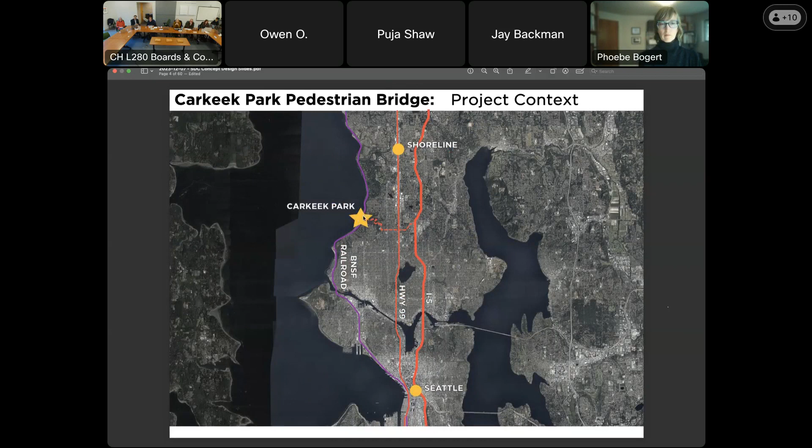When we started the feasibility study back in 2020, it was a two-part study. We were looking at the conditions of the existing bridge on the site, and also at what alternative replacements might end up looking like.

One of the things we found in the initial assessment of the bridge was looking at what life it had ahead of itself at that point. It's difficult to put an exact number on something like that, but what we came away understanding from a number of observations was that it is reaching the end of its useful life.

And there's not actually an ability to rehabilitate that structure, given that its foundations, its supports, even its height, all conflict with the requirements put forward by BNSF. So any work we would try to do would require lifting it up and moving its foundations out. At that point, we're building a new bridge. So that was what was decided.

I think something interesting to note is there's actually a spot on the bridge that was struck by a train at one point. We actually met someone at one of our community engagement meetings who saw it happen.

Things that have led to its demise over time, such as the concrete deck being right on top of the wide flange, leaving no ability to actually maintain that.

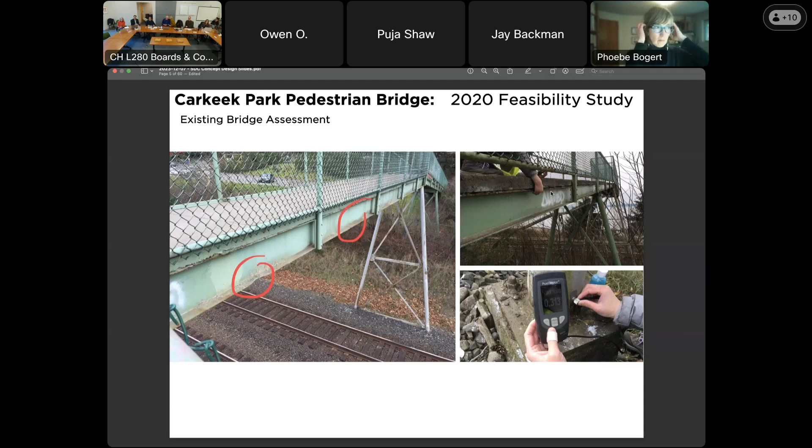And then there were some additional assessments of what was happening on various structural members, and you could see things like this, given that we're in a marine environment, corrosion is happening constantly to these materials. So that's something we want to be sensitive to with whatever we're pushing forward as the overall design.

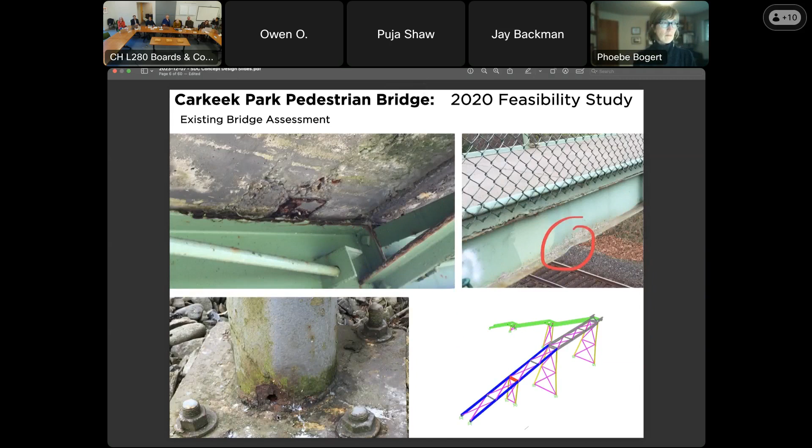So when we were then looking at the replacement bridge, we did an initial study to understand different span types we could use within this location. We're needing to pay attention to the BNSF requirements, particularly the vertical offset from the tracks, as well as the horizontal offsets from the center line.

But we also need to think about what our foundations are doing. We have two very different conditions. On the parking lot side, we have soils that we can easily bear on with ample room around them, and in particular, easy access to that. On the beach side, everything gets harder.

We have liquefiable soils. We're basically landing in sand that is in proximity to the water table. We don't have any ability to actually drive machinery out onto those tracks, so getting access to that is going to be a challenge, likely avoiding anything like barging things in, because then all of a sudden we're into needing shoreline permits.

What we ended the study with was looking at two different span types at that time. We weren't trying to fully design these, but the two different span types have different benefits to them, as well as compromises. The truss allows us to make a very economical system with easy integration of the throw barrier that we need.

So that was one of the options we were looking at. The challenge it imposes is that the parking lot foundation and the beach foundation are equally loaded, which makes a challenge for what we do on that beach side. The other alternative we looked at was a cable stay.

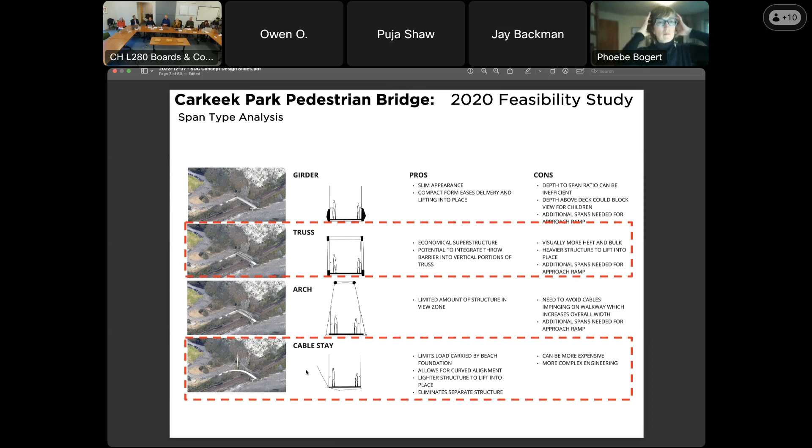The other reality is the current span is maybe a little bit more than 40 feet, but those foundations are in a location in the BNSF right-of-way that we could not replicate. So the span we're looking at is more on the order of about 100 feet long, just by necessity of that right-of-way condition.

Once we get to that length, a 5 foot wide path is not going to be stiff enough to deal with the lateral forces. So it offers us an opportunity for making a much more generous walking area on the bridge. We're looking at something in the order of 10 to 12 feet wide.

This will be influenced by what we choose as a deck material, which will then have an impact on the overall weight of the bridge, and that will then drive what the span has to achieve. So we'll be negotiating somewhere in there.

I think sometimes it can be seen as bigger could potentially be better, but in this case it's going to penalize us from a weight point of view. And at a certain point, there's not that much more we get as a benefit from that additional width.

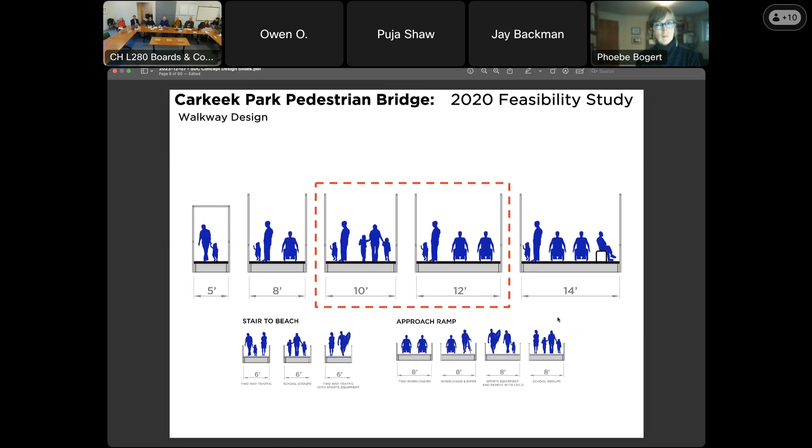We can either do a 10-foot tall straight throw barrier, or an 8-foot tall one to the maximum height, but it has to curve inwards a certain distance. The reality is when you unfold this one, it's 10 feet long. So our recommendation at that time, something we've done on past bridges going over BNSF, is to go with the 10-foot tall option. It just makes for a more enjoyable environment when you don't have something pinning you in. That's what we're moving forward with.

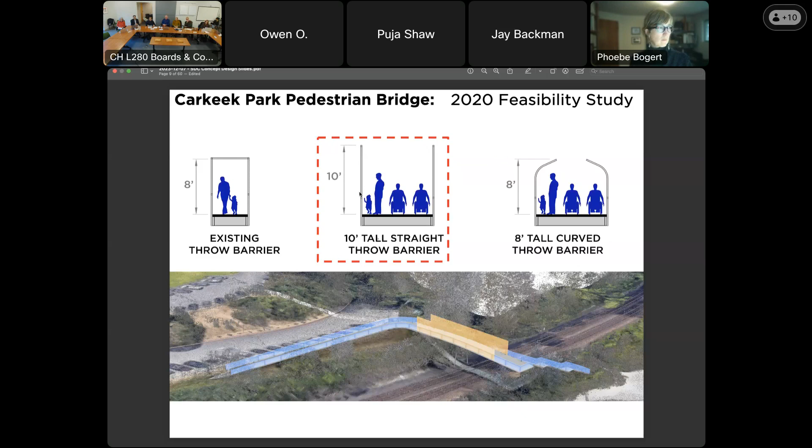It doesn't have to be perfectly straight, but it does have to be 10 feet tall. So if we were to splay it out, it's a little longer, but that can also lead to a more comfortable user experience on the bridge itself.

That then led us to the actual project competition that was put out. We were selected as part of that, and since then we've started working. I'd say we've completed this set of four initial bubbles. What we've been doing with this entire schedule is looking at how we go through the review process with various agencies, making sure we're doing that in a sequence that doesn't set us up to be in front of the public and mention things that later we have to reverse track on.

So we had an initial public engagement meeting out at Carkeek Park. We spent a day out there—DB will speak to that, hopefully. We were getting people's impressions of the park, of the bridge itself, and the experience out there.

We've put all of the material you'll see today in front of the Parks Department to get their feedback on the various alignments that we were beginning to look at, and we have some conclusions that we'll share from that meeting today. Now we're here with the idea that the next step for us is to put together a package of drawings that we then send off to BNSF to get their blessing, because they're the ones that are going to take the longest to review all of this.

And with that, I'm going to turn it over to DB to talk about the community engagement piece. DB, if you're there, just say you're there, and whenever you're ready, tell me to change slides. You could just say next.

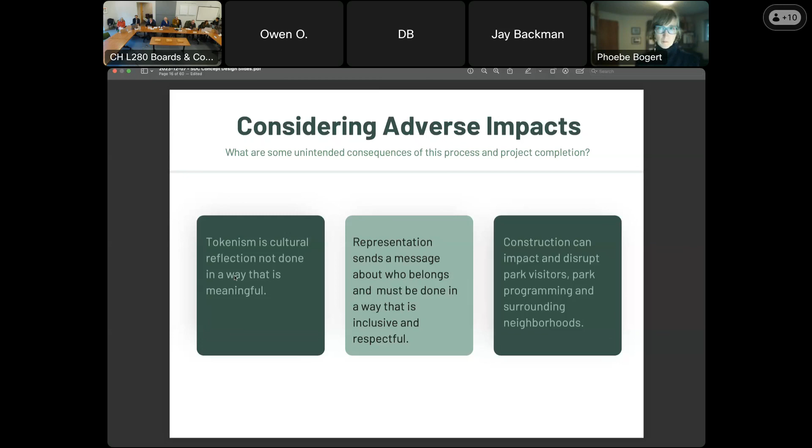How can we ensure we get representation and acknowledgement and engagement from people to make sure some of these things don't happen? Again, that was more from a racial equity standpoint and an analysis standpoint.

I'll talk a little bit more about how that really led us to create the survey, and then also the community engagement event.

We created these story leaves, and asked people to share their stories and experiences at the bridge, at the park, and what it means to them. We got a lot of feedback there, and we also did some cider pressing, which gave it an extra boost. Even though the weather was back and forth, we still had a great turnout overall, and really got key insight into what people want, how people want to feel, and memories they have from the park.

I can recall a story of some women there who talked about their experience. They had lived in the neighborhood for 80 years and talked about how they used to have to slide down the side to get to the beach before the bridge was even there, and what they wanted, how they wanted to feel with the replacement, and what it meant for them holistically. We got different stories from a diverse group of people and perspectives.

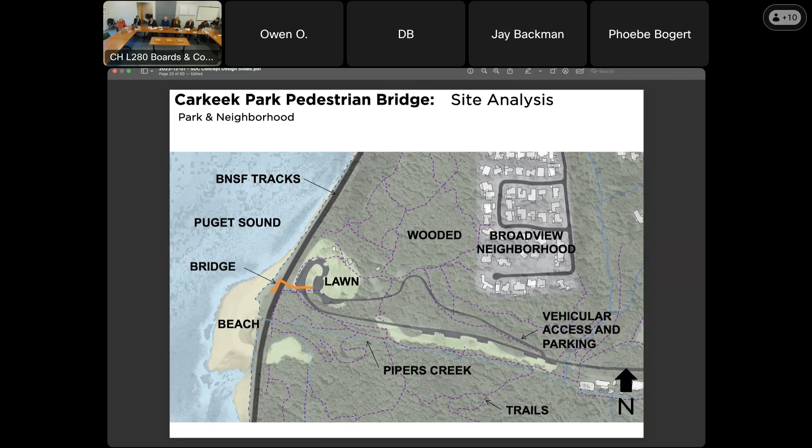If any of you have been there, it's quite a unique spot within Seattle - the progression down that winding road into the forest, eventually arriving at the lawn with the parking lots, and then the Salish Sea out beyond. Looking at the more immediate site, we have a variety of conditions.

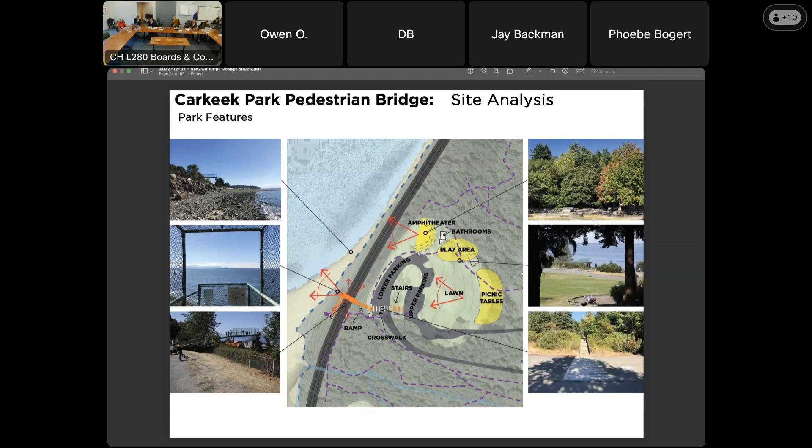We have picnic table areas, the play area, which is also currently under design for renovation - Colin is overseeing that piece of the project. We have the upper and lower parking areas as they wind around, and then the bridge finding its place on the west side of the lower parking, going over the BNSF tracks onto a small area of land on the west side of the tracks that is outside of the high water line, though that is going to continually be increasing, unfortunately. And then the beach out beyond that.

Here are some of the main circulation flows that we see around that. Within yellow, the car circulation is one way through this area. We also have the sidewalk that connects from the playground area all the way down to this lower meadow that is a historical orchard. Within the park, there's a trail system that goes through various areas of the forested zone. And the only connection at the beach is actually the bridge itself.

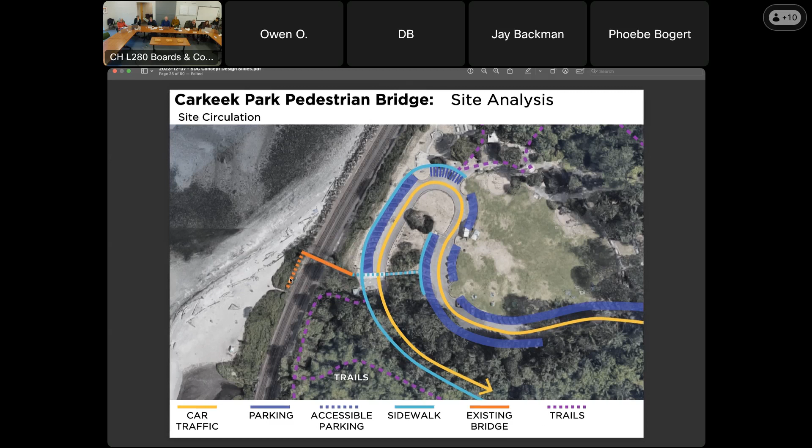So when thinking about whatever intervention we have on the site, we need to think about it from multiple different perspectives. What is the placement of this bridge in terms of this view from the park itself? It both is a wayfinding device as well as an object that shows up on this amazing vista. Here you can see the existing bridge over there.

We also want to think about what it's like to arrive at the existing bridge and how we can make it more accessible than it currently is. This ramp that exists right now is, I believe, a 14% slope, so not quite doing it. We want to think about what it's like to come over to this point and be able to then get eventually to this location.

This is one of the key aspects of this - it's partially being able to exist over the tracks so you can see those trains go by and get that rush of air as they come along and that sound Owen was talking about. But it's also a place people frequently hang out at the top of the stair and enjoy the view out to the Olympics. We really want to amplify that experience so it's not just a single individual occupying that corner at the top of the steps while getting in the way of everyone moving up and down the stairs, but instead a place where you can hang out and watch the activities on the beach as well as whatever's happening out in the Salish Sea.

Some of the things we're going to have to respond to are the topography. There's a fair amount of topography change that occurs through the area where the bridge will be located, going from about plus 25, where we need to be on the bridge, down to the water line over on the beach side.

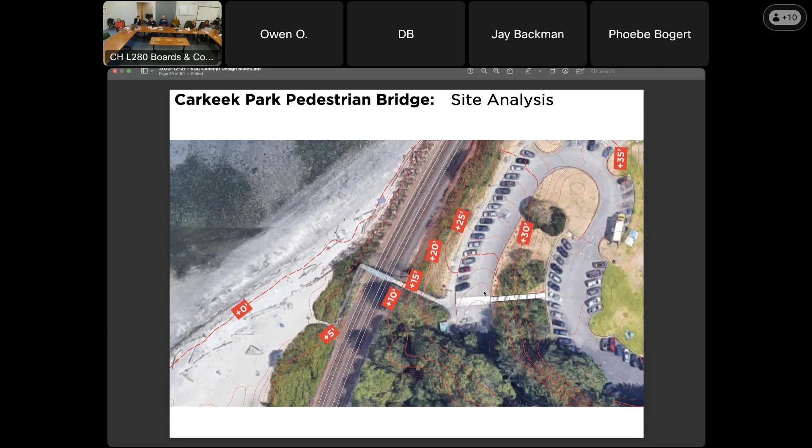The features we'll see in all of the alignment options at this point: we're looking at a sloped walkway as part of achieving the necessary elevation gain for our vertical clearance over BNSF rail. We're looking at that as a sloped walkway rather than a ramp, trying to stay under 5% with all of that.

We'll always have a 3'6" guardrail in those areas when we are outside the right of way. When we are within the right of way, we need that 10-foot tall throw barrier. The spans over the tracks need to be a minimum of 23'6" above the top of the rail, and that elevation is measured 1,000 feet in either direction of the rail, which is a fun little challenge for your site survey.

We're looking at the inclusion of an accessible view platform, trying to make this generous enough that people can gather there and have views out to the Salish Sea, while not being right at the top of the stairs as that comes through.

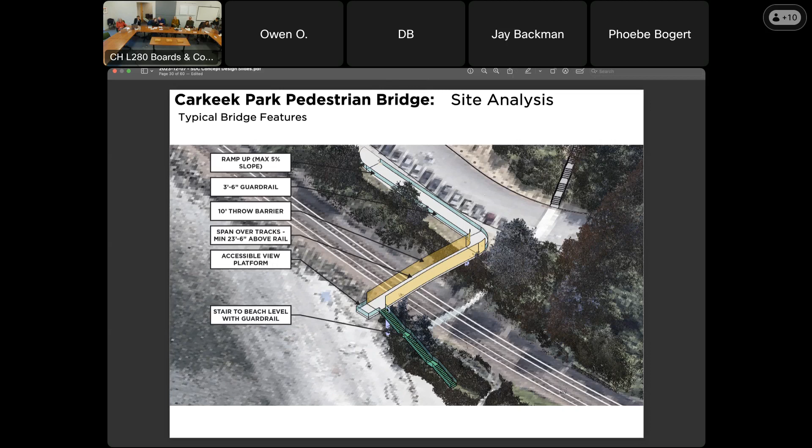We're looking at two different configurations of a stair that takes you down to the beach itself. Our accessibility strategy, which we've been developing with parks as well as with Joy Jacobson to get her review and take on this, is that we're trying to provide an accessible experience all the way out to that viewpoint.

From that point down to the beach is a 30-foot vertical elevation drop. Handling that with a ramping system would require extensive ramping. Handling it with an elevator puts that into this difficult environment. Parks is looking at this from the point of view that there are facilities within the Seattle Park system that offer a similar experience, not trying to give accessibility all the way down to the beach.

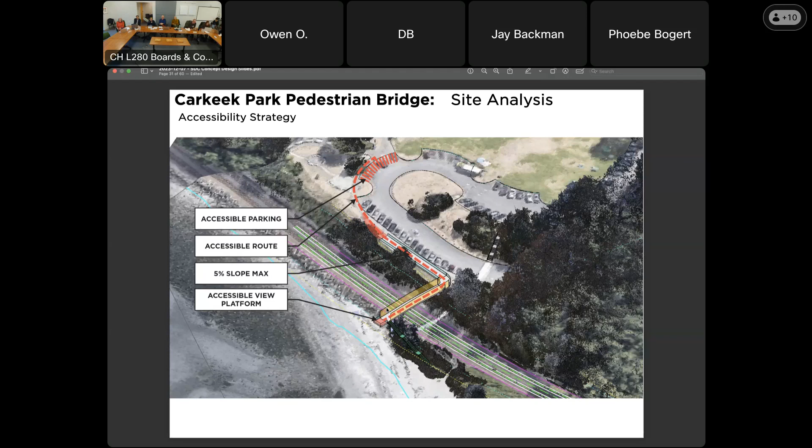On the BNSF side, there's a number of different horizontal as well as one vertical clearance we need to keep in mind. We have the center line of the tracks that everything is measured off of. Within this 34-foot zone, we need to maintain that 23'6", which we're just rounding to 24.

The horizontal clearance out a little further, out in this area—we lost the line over here—that's where we need to keep our vertical structure outside of, without having to put a bunch of barricades around it for BNSF. And then we have the overall right-of-way.

Any work we're doing within the right-of-way requires BNSF approval as well as a BNSF flagger to be out there. That's both during our construction, if we want to go out and do geotechnical drillings, and if parks later wants to go out and put some paint on the underside of the bridge. So it's an important...

It drops down to the tracks here, goes flat across, and then drops again on that other side. So within that right-of-way is also where we're dealing with a lot of topography change and steep slopes.

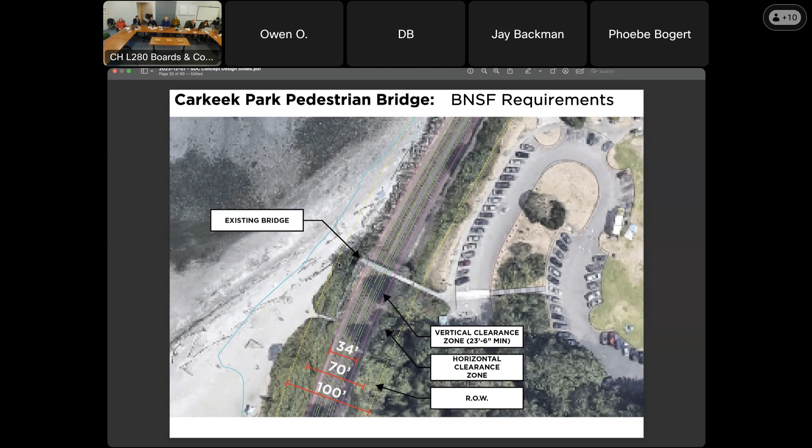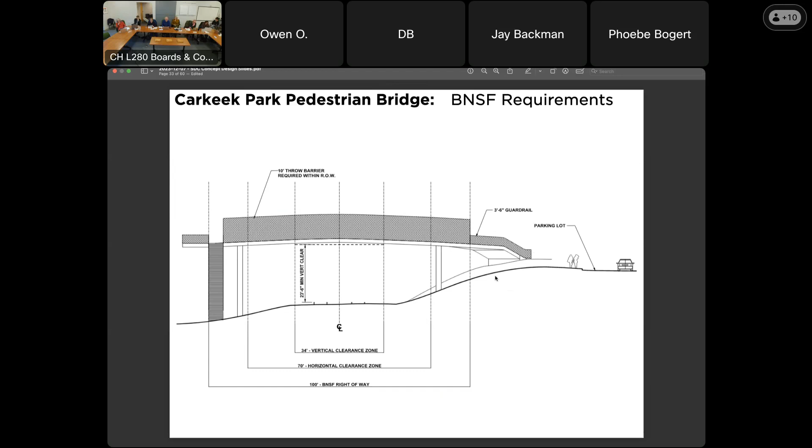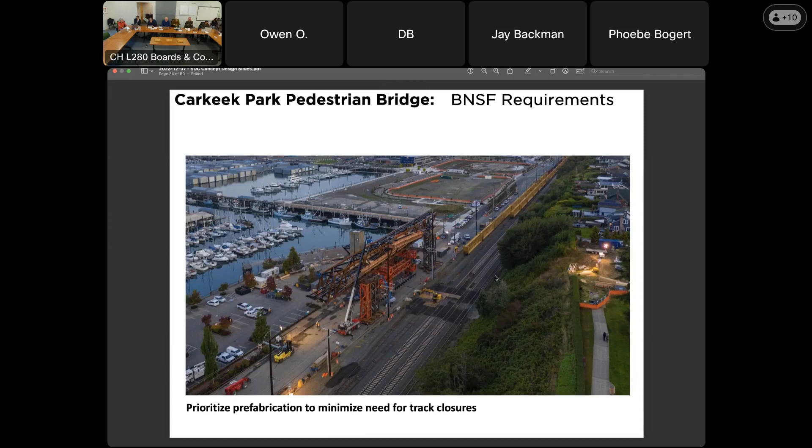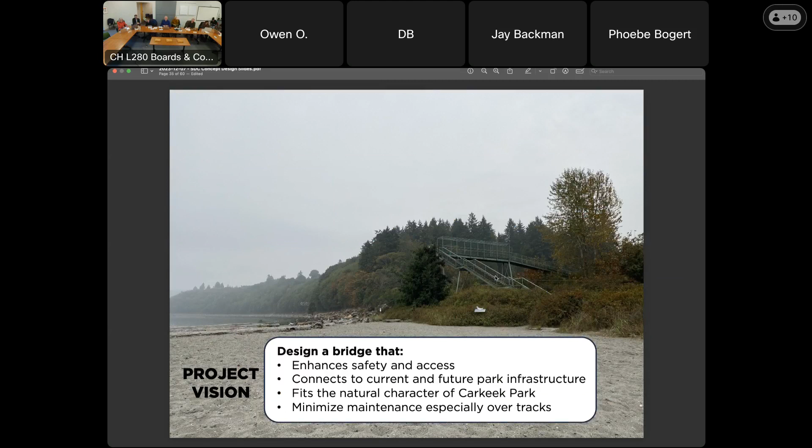So the vision that we have for any of the alignments that we're looking at is first and foremost being able to look at enhancing the safety of the bridge itself, as well as increasing the access that we have, being able to connect into current and future park infrastructure, something that fits in with the natural character of Carkeek Park, and that could take on a variety of forms, as well as minimizing the maintenance, especially over the areas of the track.

So we started by looking at 3 different alignments, and these alignments started just with the idea of we know we have to be a certain height above the tracks, and that sets up a situation that we actually, in Scheme 1, need to start ramping at the north end of that parking lot in order to get ourselves enough height that when we cross, we have that clearance that we need.

The situation that presented was the location of that approach ramp right along the edge of the parking. It's a fairly tight area that we have with a steep slope going on. We've got like a 4-foot wide sidewalk right next to the parking. So to get all that to fit in there, as well as the fact that by the time you get down here, you're about 10 feet off the ground, creates a bit of a tight situation along that edge.

So we looked at some alternative options, an idea of just being able to go straight across, which it's efficient because it's straight. But it lands us in an area of the park that is somewhat not connected to anything else. And then we were looking at a situation here where we would go still over, and in this case, we're spanning both the tracks as well as spanning the parking lot.

So there's likely more cost associated with more spans, but then we're putting this approach ramp in a location that connects right back into the heart of the park where the playground and the bathrooms are all located, as well as connections to the accessible stalls within the parking. And it gives us an easier location for actually developing that approach ramp.

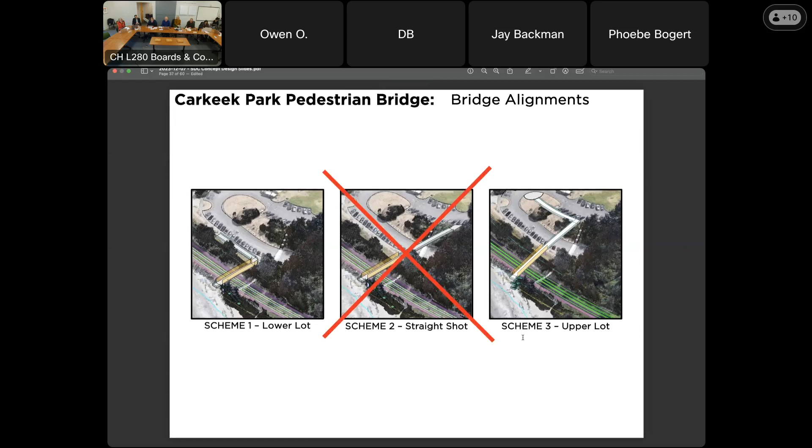We have the model here. We have the additional backup slides with it if we want to dive into that in any detail. But we're looking at now scheme 1. The overall approach length from the time that we need to start elevating is 230 feet. It's about split in half of 140 of that being this approach ramp. And then we move to this location here where we're spanning over the tracks, coming to the other side with a viewpoint and then a stair down to the beach.

We think that this could be done in either a truss or a cable stay. The downside with this alignment when it comes to a cable stay is we have no backspan available to us. So the mast that we would be making is doing all the work to just hold that one span out there, and that'll change when we look at the other scheme.

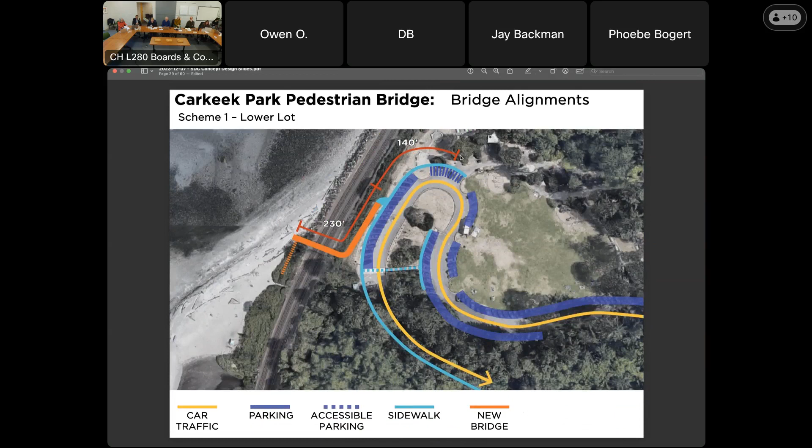So from there, we're also looking at what is the length of connectivity to the playground area. We're not expecting that we would be redoing all of that area, but instead just thinking about it, how does this tie you into the rest of the park experience? And then what are the other connections that it's tying you into? Being able to connect up with the sidewalk here that allows folks that are coming from the lower area to the bridge, as well as connecting up into the main area of the park.

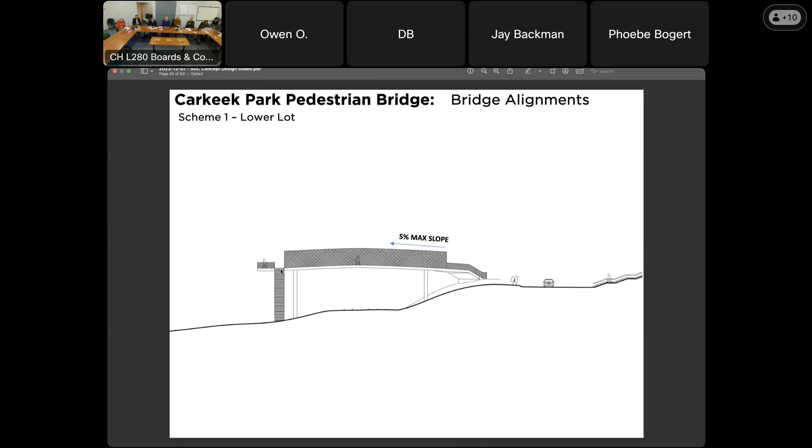We're looking at a cambered situation where we need high clearance above the tracks in the center portion, which sets up the ability to slope back down after we crest over the tracks. This creates an interesting experience where you end up higher than the guardrail at the end, giving you more of an open vista out to the water.

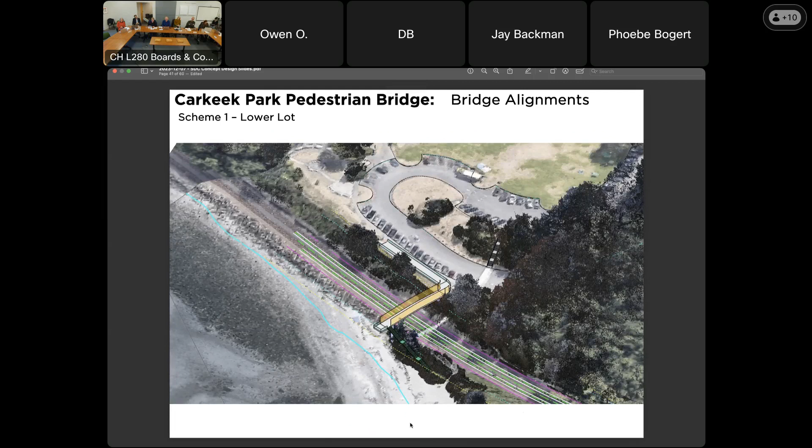So here's a view of that overall scheme. This cyan colored line you can see here is the current mean high water line.

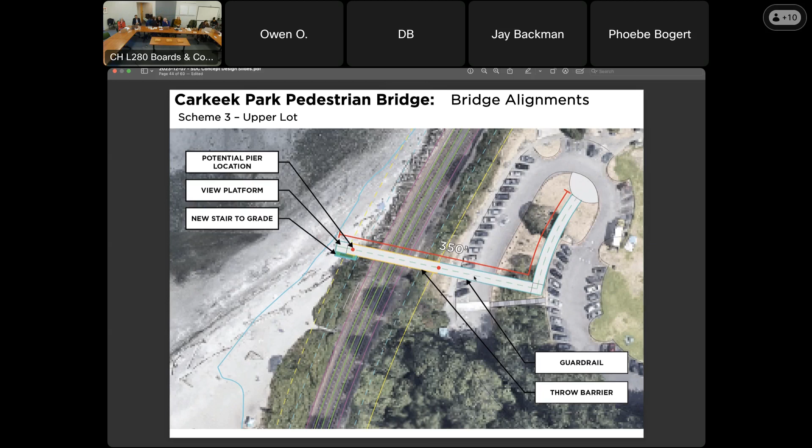The other option we're looking at, scheme 3, is spanning over the tracks as well as over the parking lot itself, coming to an area within this planted median where we could have a structure more built up on grade, connecting back into the central part of the park. This sets up a situation where we need clearance over the parking lot as well as the tracks, but it all fits within the overall geometry of what we need to achieve.

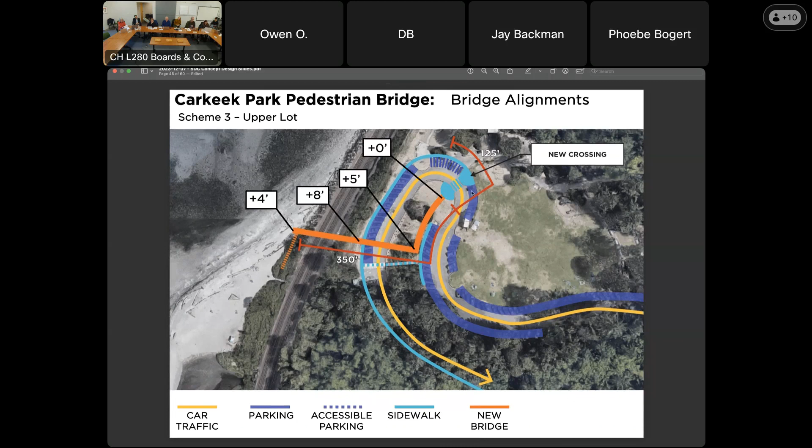We're looking here at the ability to connect back into that parking lot area. In the end, this creates a similar length of travel to what we saw with scheme 1, and here's how the general elevation changes progress along that ramp. The high point actually has more to do with the parking lot in this case, and then we come down to this area, which allows us to minimize the vertical offset we have.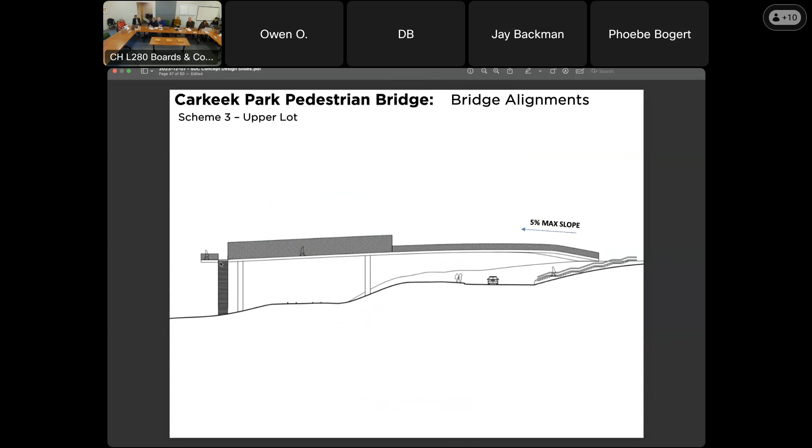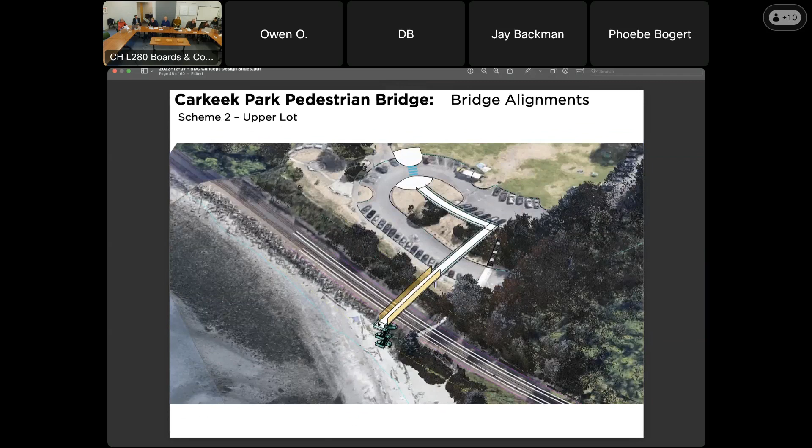So these are still the two options we're moving forward with in our analysis. In particular, we want to look at the cost comparisons between these, which will be a significant driver. As we move forward, we're also considering the materials we choose and their effect on embodied carbon, making sure we're not using materials that would conflict with the salmon near Piper's Creek.

Such as galvanization—the zinc associated with that is a biocide. We're also looking at maintenance, ensuring the areas over the tracks in particular don't need to be constantly maintained by the parks system, as well as the deck surfaces, which impact weight, which impacts the foundations and the overall span.

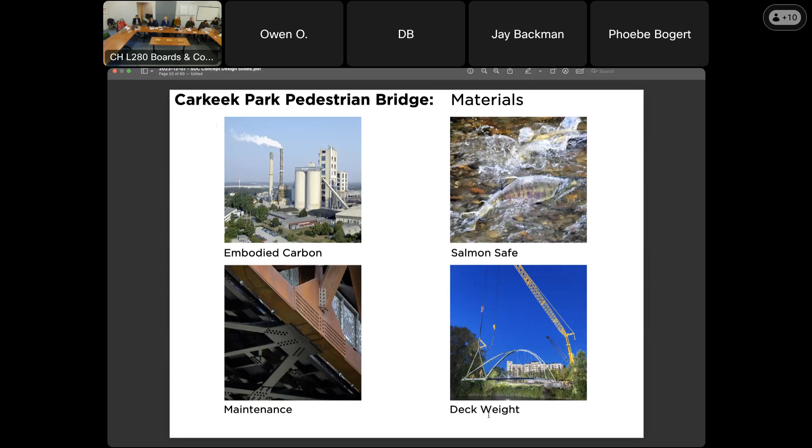So with that, I'll turn it over to you all for comments and questions, but thank you.

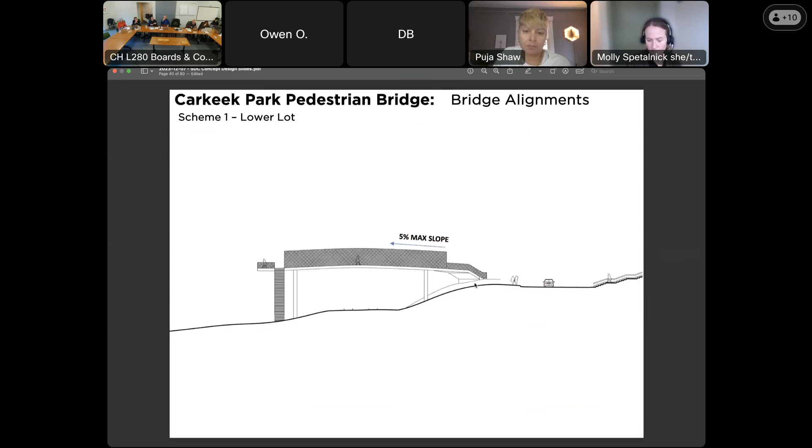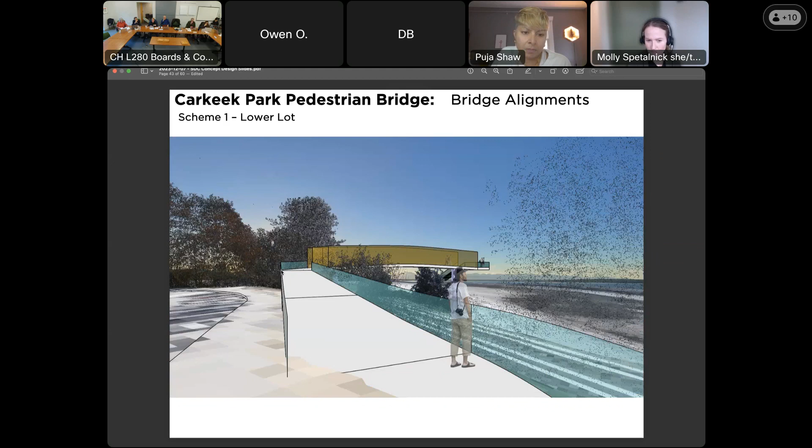Yep, this scheme is the bridge is higher than it would be in scheme 1. Very much so. And how much higher? At that location there, I would say we're probably looking at—this is a guess right now—but that's probably about a 12-foot height, and I think within the other one we're probably looking at more of a 9-foot differential. And I think the thing there that comes back to this kind of view is the proximity of what's happening vertically right at the edge of that sidewalk versus, in this case, that difference being something that you're essentially able to walk under. One of the things we've been considering is whether or not there's a stair that gets located at this location.

Scott, you have the slide that had the delta changes in grade. Yeah. This way, this one. Yeah. Okay, thank you so much. That's all I had. Thanks, Puja.

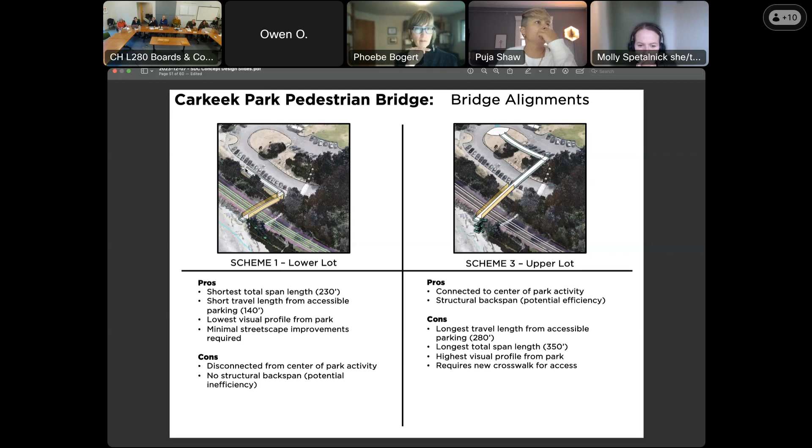And then the slopes — just for understanding it — on scheme 1, you're coming down, I mean going up at 5%, and then you're crowning so that the bridge has a crown in scheme 1. It's a continuous down slope from the upper lot all the way continuous across the bridge to the viewpoint, correct? Correct.

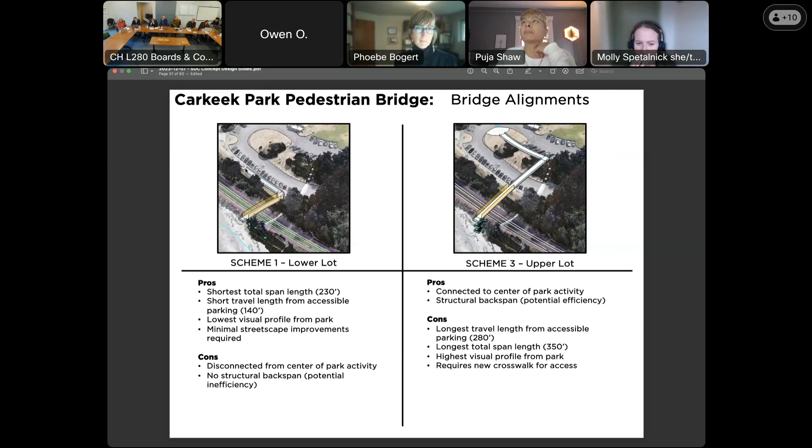Yeah, thank you for the presentation. I think my fellow commissioners asked a lot of the questions I had on my mind, but to go back to the approach walkway width — we covered that for scheme 1. Is that the same for scheme 3? Would it match the width of the bridge for the crossing over the parking lot?

I think it could. With the approach ramps, we want them to be comfortable for people circulating on them, but we're seeing them as a different experience than what happens on the span over the tracks, in that there's likely less people trying to linger on those approach ramps.

With that said, in scheme 3 we have a lot more width available to us to make that path what we would want it to be, while also recognizing every foot of extra width brings extra cost for us. So that's something we'll have to be conscious of with any of these options. Understood.

And then for the ending on the beach side for both of these, do they end at different elevations? Both from a stairwell getting down to the beach perspective, as well as considering any potential future ADA compatibility to get down to the beach. Could you speak a bit more on how both of these structures land on the beach side?

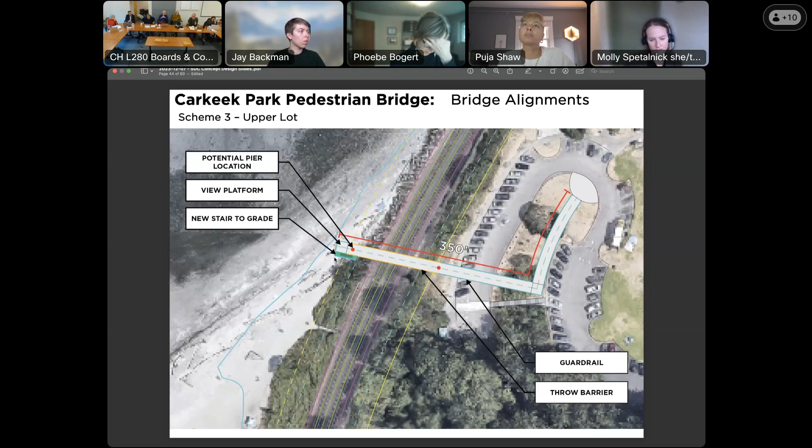I'm someone who lives in Northwest Seattle. When I access this place, I walk in via the trails. And that alternative 2 ramp is sort of closer to where the trails come in from that direction. So I was wondering if that was a consideration in developing that alternative, and is that a consideration now that we're potentially losing that? Is that a concern on anybody's part, as opposed to trying to access from the parking lot area?

Yeah, the challenge that we were seeing with this was - we think this location within the park could be okay as a spot, given it actually relates to a lot of the parking that continues to the east. The challenge is there's no other infrastructure in this area.

And so in comparison to Scheme 3, now all of a sudden it's like, okay, we've got to go across here onto the lawn. And now we need a sidewalk to wrap the entire lawn. It just felt like it eliminated itself because of all of that extra.

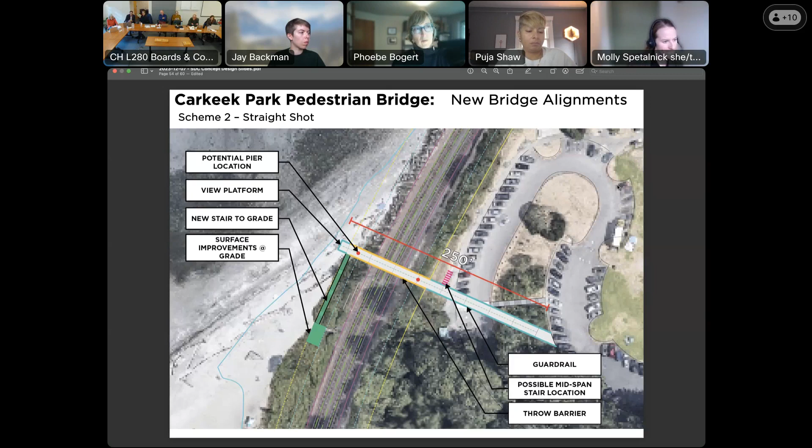It's still a concern we have with Scheme 3 of the additional length that's there, but we think it affords some other opportunities. And then the other question I have - can you go back to the pros/cons slide of the two remaining alternatives? How are you going to evaluate these? Do you have specific criteria? I'm thinking about your vision statement - you've got four. Are you going to use those as ways of evaluating these?

I would say with both of them, we can probably hit those vision pieces that we have for the project. I think a big driver of this is going to come down to cost, and that cost is going to be the superstructure itself and the foundations.

Those are the two elements that are going to make up the vast majority of the cost we're looking at. What we're trying to understand is what it means to build this approach ramp, likely a set of small spans, on a slope next to the railroad right of way, which seems like it's going to bring some cost, versus this location where we have more space available and the ability to construct closer to grade, even potentially as a slab on grade approach.

That's going to be a lot of what decides between one and the other. If we find they're close, it'll be an easy choice based on the better experience. If they're vastly different, we may have to look for additional funding, which could create a delay. But that's something we'll work with Parks to figure out.

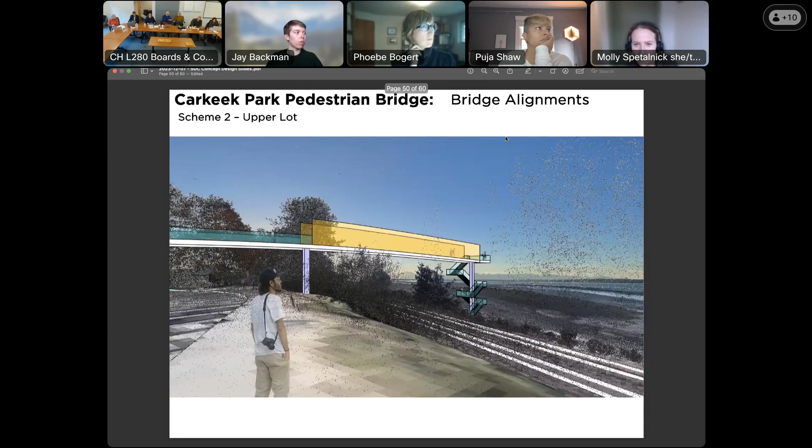So you say on scheme 3 it's connected to center park activity. Do you have a diagram that speaks to that? I'm just trying to understand what this is.

I think what we meant was feeling like it was a more direct connection to the lawn area, the picnic areas. It's in a highly visible spot versus the alternative, which is walking along the edge of the parking lot the entire way to get to that same location. It's trying to put the arrival point for the bridge closer to the activity, rather than walking along a sidewalk before recognizing where the takeoff point is located.

So if you park in that lower level and want to go in this scheme, you would walk up the hill and around the corner to that spot.

My experience of the park has been that parking is at such a premium, there's a high likelihood you're walking from a distance anywhere you are within it. And then it's thinking about how more people, out of their cars, hanging out and enjoying the park, progress from the lawn playground area to the beach and back, potentially multiple times a day. Do you have the same diagram for the other option?

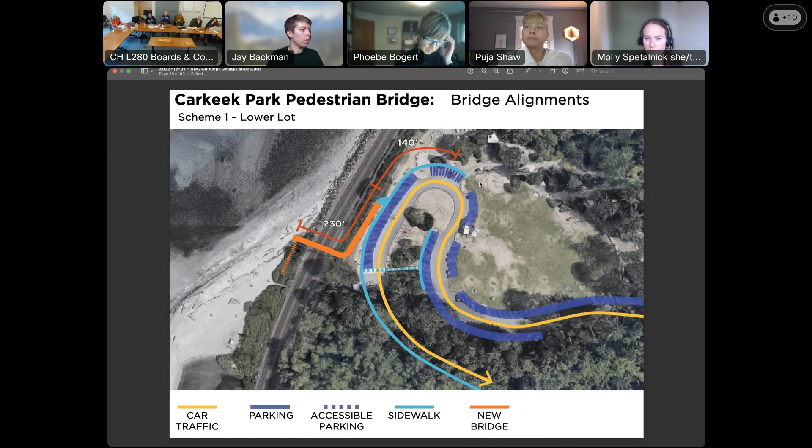A question might be, is there a connection? To me with the bridge in option 3, the big piece is the span over it now - it just seems so intrusive out there.

And I know you guys do beautiful bridges, so I know it'll be a beautiful bridge, I have no doubt about that. It's just a thing - it's like looming out there.

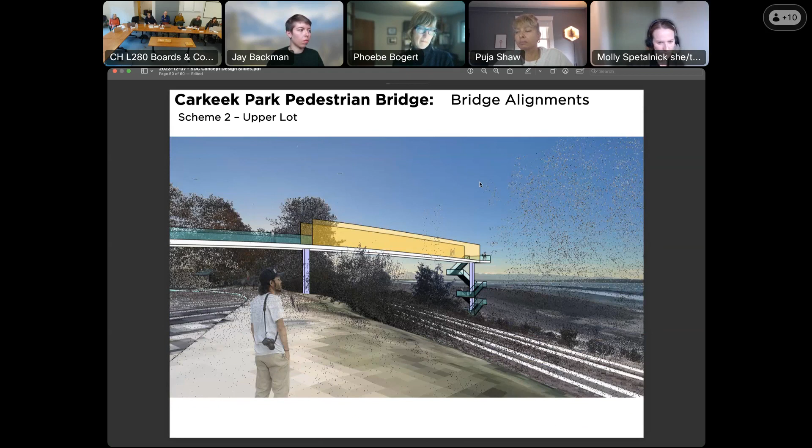I was wondering if there's a way of connecting the park at grade to scheme 1, so you have a better connection from the central park area you were just referring to, instead of building a big structure.

I don't think we've ruled it out or found that it's a definite at this point. I think it needs further study in terms of what we can support on the project, as well as the question of equal accessibility - if we're suddenly creating this shortcut, it could be seen as not being equally accessible.

We're just asking, we're not commenting - we're going to be commenting. Thank you very much, that's very helpful.

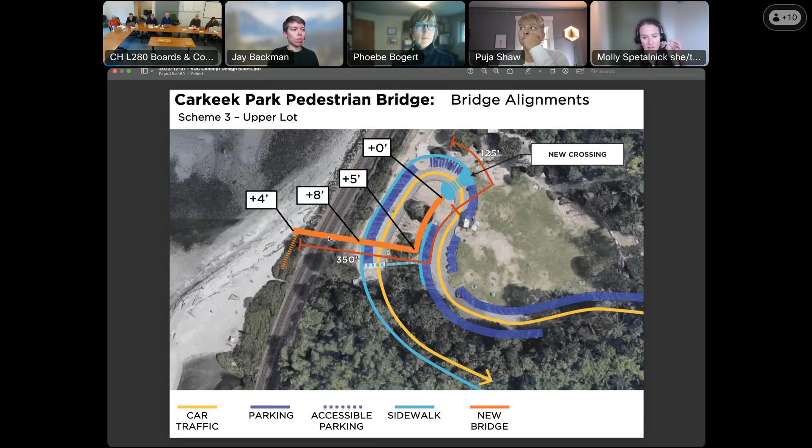So let's go in the same order. Molly, if we could start with you on any comments or recommendations. Great, thank you so much. So again, thank you for the clarity on Hummingbird and Headwaters work. I really appreciated that the opportunities to drive design outputs was brought up early, and that this will be continuous work on both sides. So we look forward to updates in that regard.

I also appreciated the improvements to ADA access in terms of widths and the potential for future ADA improvements to the beach outside of this project, if ever plausible. So maintaining the opportunity to do that if it's ever available is great. And I agree with the idea of bringing someone like Karen Braitmayer on board to really help whichever option selected be best for all of our users who are now gaining additional access to this space.

I appreciate the use of models for grade understanding. I know I'm not in the room, but I know that that's really useful for community engagement. So I'm interested to hear how that helps your community engagement process and what you learn from conversations around models with those you're engaging.

You likely have these somewhere, but I think I heard a lot of commissioners ask this same question. I think clearer context diagrams with destinations and desire lines would be really valuable for us for future briefings and for public engagement - so where it's really clear where the playgrounds are, where the restrooms are, where the trails are, so that you can really get feedback on where people are coming from in order to access this.

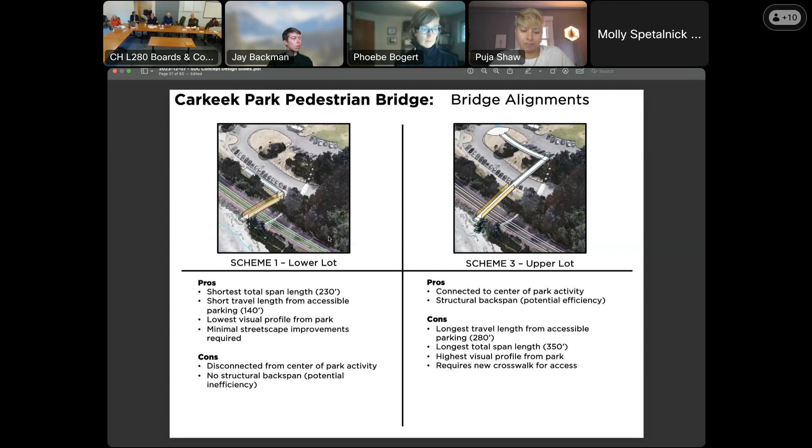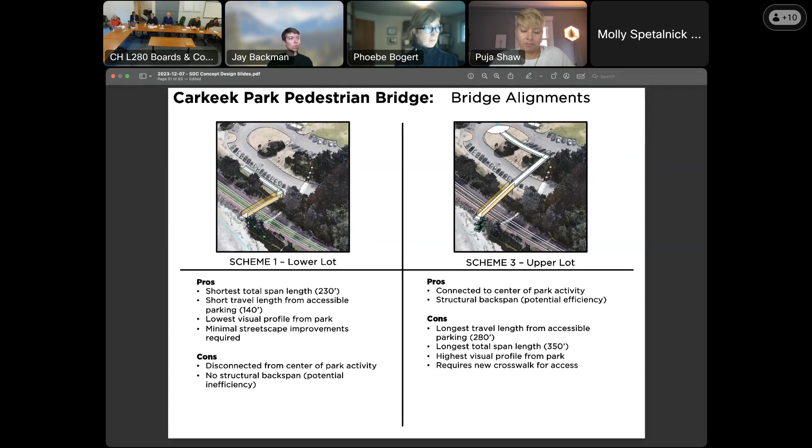Second, when you say cost is a big factor, I would love to have you say resilience is a big factor as well, and cost and resilience should be balanced against each other — short-term cost now versus long-term resilience. I think people have thrown you a lot of ideas that fit in that bucket as well.

Lastly, in terms of the outreach for the local community, the intentional outreach for BIPOC constituents, the intentional outreach to indigenous people is all fantastic. You need a parallel outreach to the disabled, ADA community.

Because I think with the access van program and other things, this should be a citywide, countywide, region-wide asset, and you need to be evaluating and hearing those voices as well. Karen's great, but she's not the answer to that. Embedding it in your outreach at a bunch of levels is going to give you the 360-degree look that you need.

Now I'm going to add a fourth point, because what he just said about the parking lot is so true. I can see a day when that parking lot is all ADA parking and able-bodied people walk on a trail. I think you need to really think — this is a 50-year, 100-year investment — about what all of these demographic trends are going to lead to.

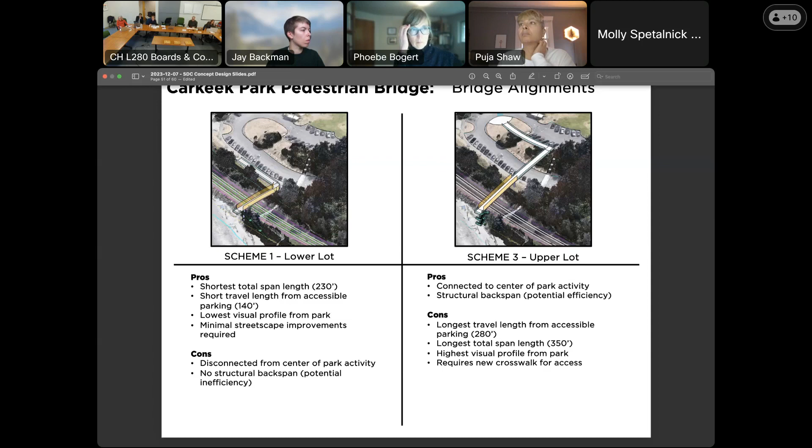So with that, Jill, do you have any other comments before we get to the final recommendation? The question we have next is, have we confused you about anything? Not everything. I think the questions and comments you're making are the ones we're finding ourselves grappling with as we're looking at all of this.

If there's anything you need us to clarify, you can do that while Kevin is finalizing his. No, I think it was all fairly clear. Okay. Same with this. Got it, Kevin? Yeah, I think so.

So our action today would be whether we're ready to approve the direction of concept development for the Carkeek Park replacement project. I'm going to try to articulate the following recommendations as came out in the discussion. One, public outreach, a whole bunch of aspects there.

Continue public outreach throughout the course of the project. Be clear about how public outreach is informing the plan development all the way to the final preferred alternative. Continue with the inclusive outreach you've done. The commission really appreciates that, so continue with all the communities you've reached out to, and certainly the accessibility disability community is a really important one. In terms of your methods for community outreach, continue to use models and graphics because that's really helpful.

Also, be as clear as possible with the overall context of what you're doing as it relates to the whole park. That's really important for the public to understand. And totally agree with the comment about really thinking about what's happening in the park as one vision for what you want to accomplish and how these pieces connect.